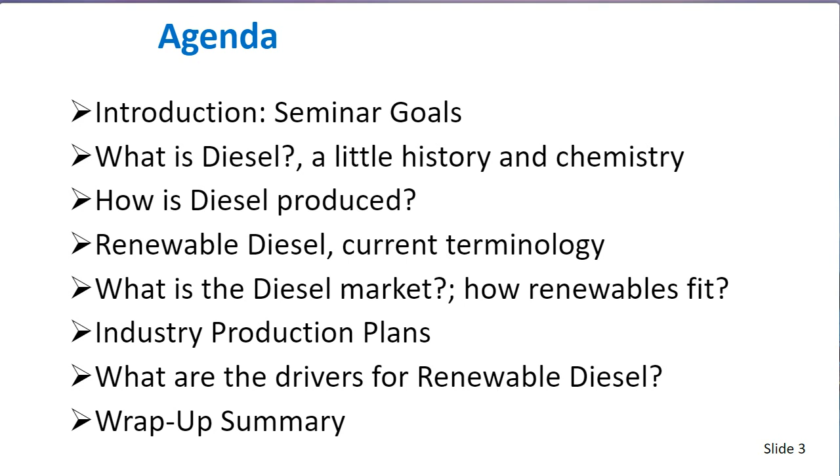So the goals for this presentation are to give you a high-level overview of renewable diesel, what it is and why we're concerned about it. We are going to be focusing on the known situation. I'm not going to get into forecasting wild cards of what might happen or not happen in the future, but just what we know at this time. We'll be primarily talking about the United States, although there are global interactions that are important. We will compress a lot of information into a short period of time, targeting for 45 minutes, and things are in a high state of flux, so anything you see might be changing rapidly in the future. Then we'll be gathering any points of interest for future follow-up.

Talking about the quality of the information we have here today, this information is in a rapidly changing area of renewable diesel, so expect that whatever you hear today is probably going to be changing. To my knowledge, all the information I have found here is in the public domain from various sources. Nothing is proprietary, it needs to be protected in that regard. The other thing you'll find is that the terms, when we talk about renewable diesel, are certainly not standardized at this time. So be cautious when you're comparing reports and data from different sources. I will also add that the dimensions and amounts of renewable diesel seems to generally be included in what we call biomass as an energy group when you're comparing data broadly from other energy sources such as nuclear, petroleum, coal, natural gas, solar, wind, etc. So biomass may include renewable diesel. Again, terms are not quite settled yet. So be careful, because renewable diesel data can be sorted in many different ways. So as you're digging into this, be careful to sort your data appropriately.

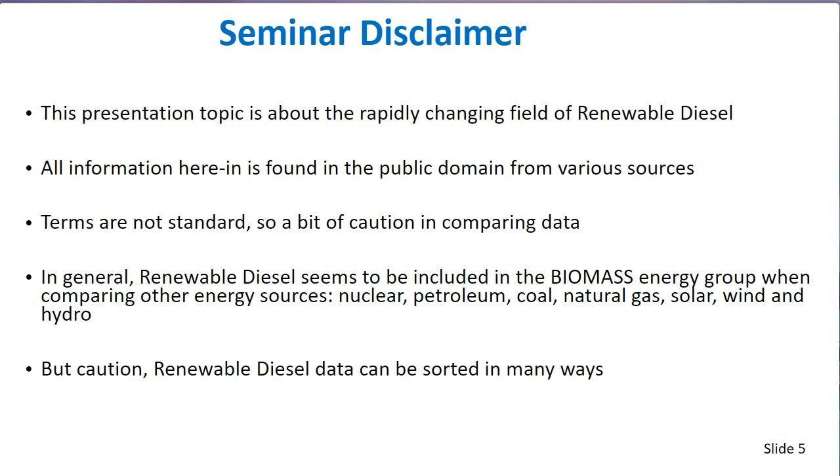Let's begin by talking about what is diesel. How is diesel produced in the industry today, what are some of its properties, and how does a diesel engine work? The diesel engine was developed by Dr. Rudolf Diesel, a German who studied engineering at the Technische Hochschule in München, and his goal was to improve the fuel efficiency and energy efficiency versus alternative spark compression engines or steam engines. He developed his compression ignition engine in the 1890s, and it was first patented in 1892.

In 1895, he founded MAN, or Maschinenfabrik Augsburg and Nuremberg, which is a good company today. His engine was tested successfully with a wide range of fuels, and it was originally developed on peanut oil. He found that he got very good performance with carbon molecules that were in the C12 to C20 carbon number range.

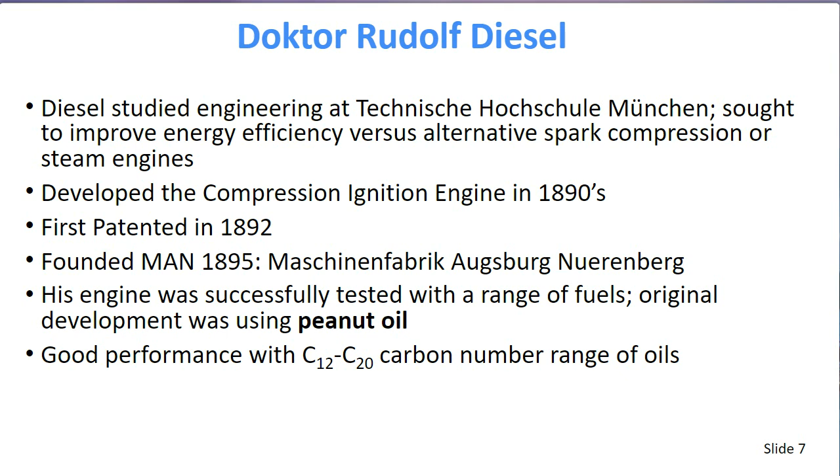Here's a picture of the first diesel engine. It's at the Museum of Technology in Augsburg. This first engine was one cylinder, it was about 3 meters high, and it was patented in 1893. Quite a big flywheel you see there.

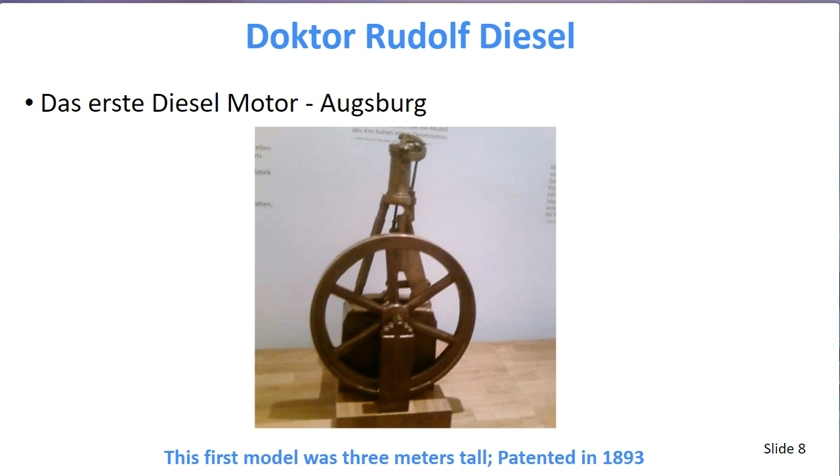Rudolf Diesel's first most efficient fuel was peanut oil, and that's the start of the story of renewable diesel. He had one problem though, or we all did, and that was there was not enough oil for fuel supply for his engine. Looking back in the late 1800s, agriculture and marine culture were limiting oil sources. Cod oil was being exploited, farming was at a small scale, whales were being hunted to extinction, and forests were largely being cleared.

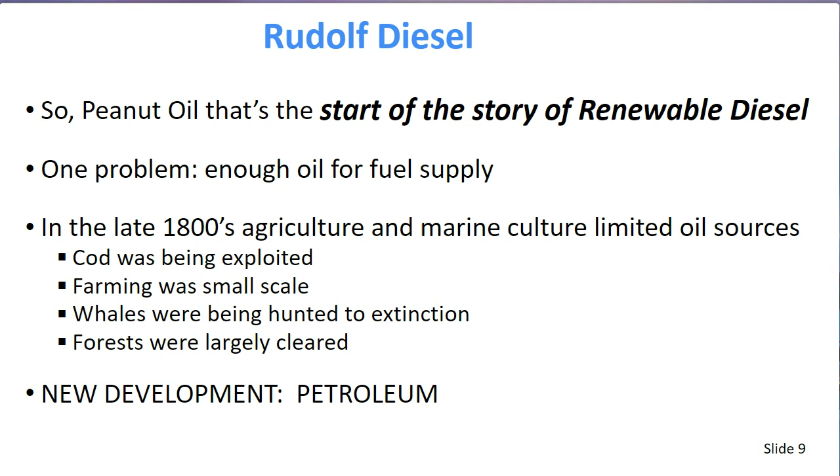However, parallel with that, there was a new development, petroleum. With petroleum, it was discovered that there were these diesel boiling range materials in natural petroleum. Petroleum itself is a mixture of molecules from methane, one carbon number, up to larger than asphalt, over 100 carbon numbers. These molecules consist mostly of carbon and hydrogen, so they're called hydrocarbons, but they can contain other atoms such as sulfur, nitrogen, oxygen, which are called heteroatoms.

The absolute composition and properties of crude petroleum vary a lot, depending on the original geochemistry. The diesel range, carbon-12 to carbon-20, is typically about 30% of crude oil's yield in composition. In that same range we have jet fuel, typically 12 to 16 carbon numbers, which can be separated from the diesel range or included in diesel. Refineries typically recover diesel from crude oil, and can also convert larger molecules, heavier than 20 carbon number, into the 12 to 20 range through processes called conversion.

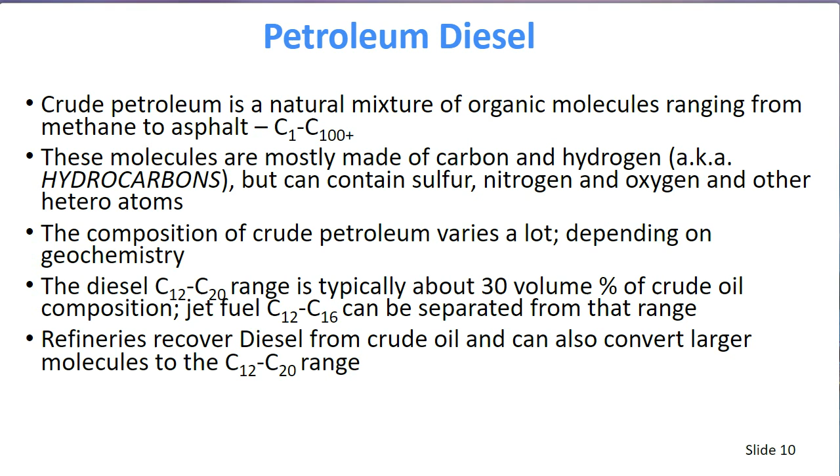Let's look at some of the key qualities for diesel fuel. Some of these include cetane, or its burning properties. The reference is normal cetane, a 16-carbon straight chain molecule, which in a test engine has a reference performance of 100 cetane. Cetane is a measure of the tendency of the fuel to knock, in other words the unoptimal ignition of the fuel. The specification for finished blended product diesel is typically in the range of 40 to 50 cetane number.

Lubricity is important because it's the viscosity required for the dispersion of the fuel and preventing wear of engine injector fuel. Sulfur is another important property. Sulfur causes corrosion in the engine, but we can mitigate that with a proper lube oil program. Also sulfur burns to form sulfur dioxide and sulfur trioxide emissions, which are environmental concerns.

Very important in diesel are what we call the low temperature cold characteristics. Two of those are the pour point - in other words, for this diesel fuel, as we lower the temperature, at what point does it no longer flow? Yet another is the wax appearance point - again, as we lower the temperature of the diesel, at what point do wax molecules or solids tend to form in the fuel, causing a problem with filter plugging for the fuel system.

We want to make sure the diesel is safe to handle, and the property we mostly watch is the flash point, which is the temperature at which, with a spark, the diesel will ignite. In other words, you raise the temperature, and at some point it will ignite - that's what we call the flash point. Yet another and last is stability. It's very important for storage - we don't want the oil to degrade with storage, forming gums and other problems that will foul our engine storage system and combustion.

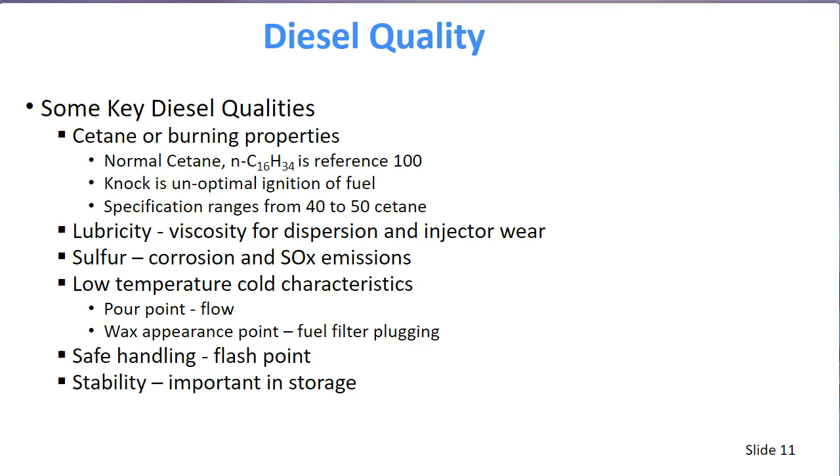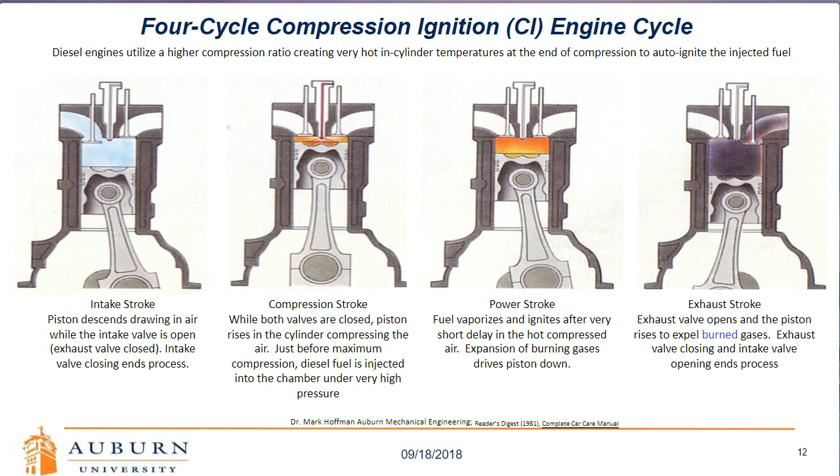So now that we understand a little better about where diesel comes from and a little bit about its properties, let's talk about renewable diesel, and we'll move on to talk about the diesel market.

One, you mostly hear about, is biodiesel. This typically is fatty acid methyl ester, which is easy to produce. It's what I think of as the first generation of renewable diesel, and it's essentially most of everything you hear about today. It has limited production, and it has some quality and compatibility issues that we'll look at. It's also hygroscopic, which means that it absorbs water, so it has to be carefully handled as far as logistics are concerned, because we don't want wet diesel.

The next group of renewable diesels is hydrogenated vegetable oils. This is what you're hearing more about as coming into the market, or HVO. It's the next generation, and it requires hydrogen processing, and the product therefore becomes compatible and is quite useful in petroleum diesel mixes and in diesel engines.

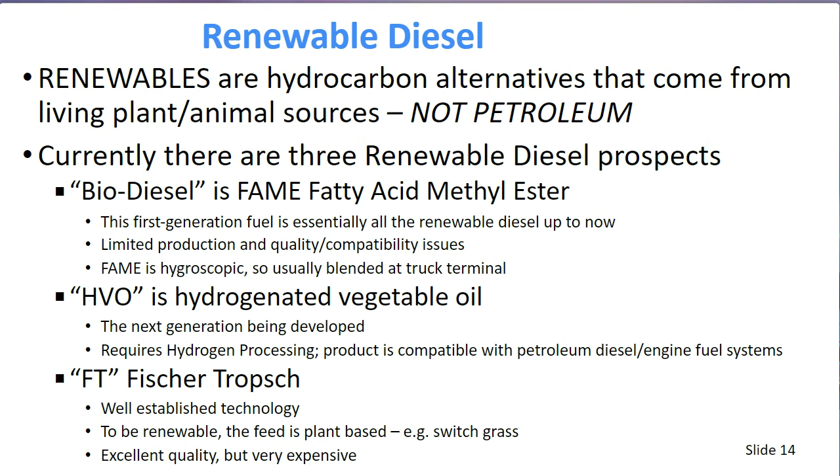So why not just burn raw waste oils or fats as diesel fuel? Well, my friends that are in the industry tell me to make emphatically sure that we express that this is no, no, no. These unsaturated fatty acids have lower oxidation stability. They react with oxygen in the air to produce peroxides. They degrade to produce products that cause sludges and lacquers in the fuel system. These natural oils also have lower thermal stability, and so they gum up in the diesel engine, injectors, pistons, rings. They gunk up the ring grooves, cause sticky rings, and it's just not good for the diesel engine, and the disastrous results can happen pretty quickly.

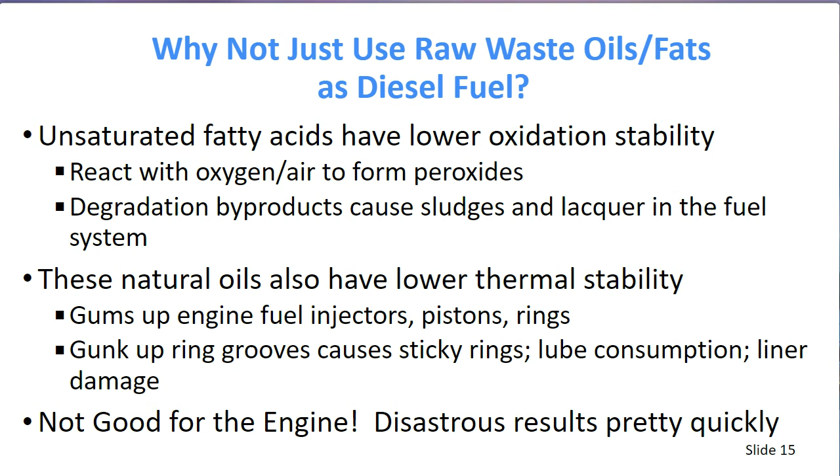So, no, no, no. Let's visit this first generation of renewable diesels, which I think of as biodiesel today. You'll hear biodiesel and renewable diesels used interchangeably in sources. I like to separate them and use my terms of renewable diesel, but fatty acid methyl ester is one of those.

The base is a fatty acid vegetable or animal oil, and by nature, this is rancid material. If you've ever had old oil hanging around the house, you know it turns sour bad. That acidity causes corrosion problems. Now, we can correct that by turning it into an ester, and that reduces this issue of corrosion.

It's relatively simple and can be done in small batch processes. It needs a catalyst, which can either be a strong acid, such as sulfuric acid, or a strong base, like caustic. Molecularly, what we take is that fatty acid, and we react it with an alcohol, and we therefore get this fatty acid methyl ester, and we also get a byproduct of glycerin.

My friends at Auburn in chemical engineering say that a good opportunity is to somehow recover this glycerin in this process economically, as it is very dilute, and there's a lot of other impurities in the glycerin phase. So it's just gone to landfills right now. But glycerin is a valuable product - you and I use it, and that's a different subject. But if we could recover that glycerin economically, it would really boost the attractiveness of FAME.

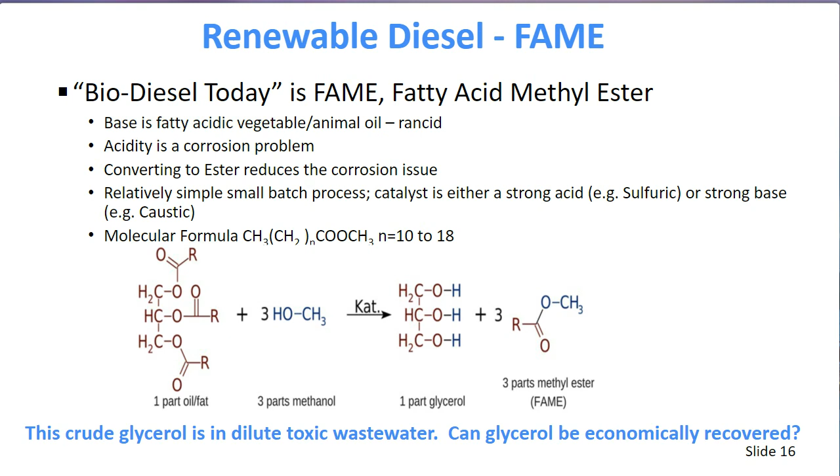So let's talk some more about this renewable diesel FAME properties versus petroleum diesel. FAME has good cetane - it's about 56 versus 50, and that 40 to 50 is a typical spec today. It's a little bit more dense, that's not a big issue. The FAME energy content is a little bit lower, not drastically. The CO2 equivalent emissions is a little bit favorable versus petroleum.

But FAME has an issue with what is called wax formation. It's not actually wax - these are solid particles of glycerides that do form and plug filters. Also, FAME oxidation stability is poor, and so FAME causes fuel injector corrosion and spray blockage. It can affect elastomer seals and cause failures, and so it's really difficult for engines as we design them today to handle them.

Engine manufacturers and therefore pipelines limit the FAME in a diesel blend to 5 to 7% of the product diesel, and we in the industry call that the blending wall. That blend wall limits the amount of FAME that can be blended into diesel. Additives have helped to some extent, but this blend wall limitation on FAME blending will not meet some of the goals that are in place for replacing petroleum diesel with renewables.

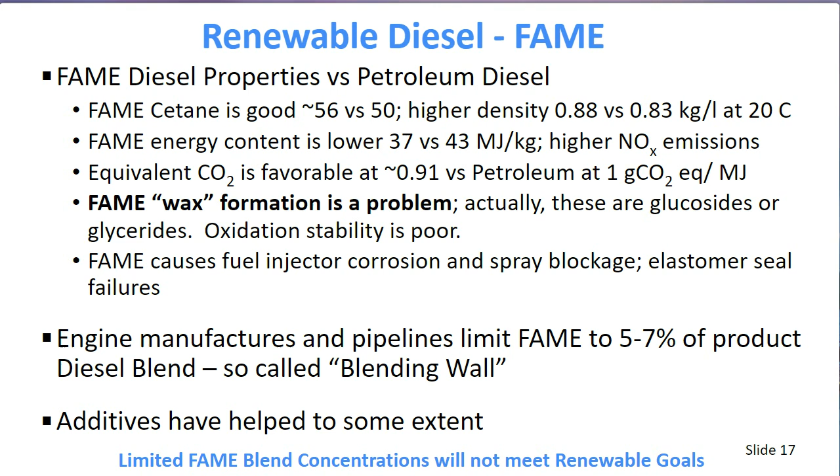So as we just said, this blend wall for these so-called biodiesels limits the amount of renewable diesel that can be made with that convention.

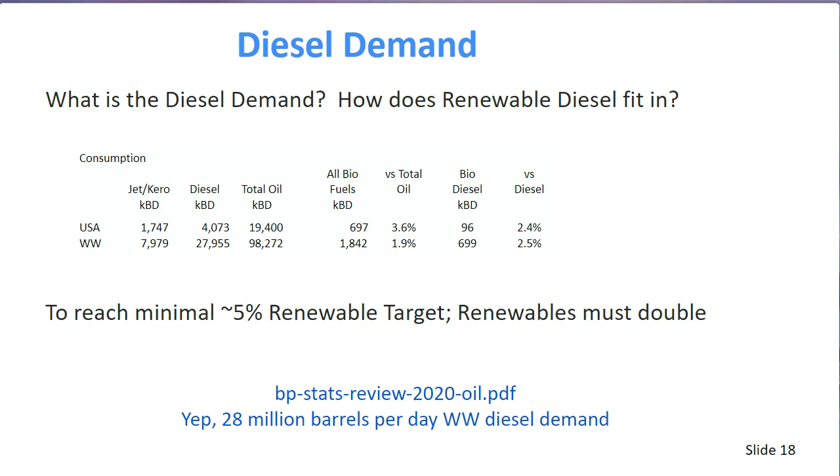So what's in the press today are the next generation of renewable diesels, and these are hydrogenated vegetable oil. People call it biodiesel tomorrow. This HVO is the second generation. The base is still vegetable oil or animal fats, but it's hydrogenated to treat the acidity issue that comes with these natural oils.

Sometimes we can hydroisomerize to improve some of the cold flow properties by using hydrogen. We have established technologies that we use in refining, petrochemicals, and food processing to do this. It does require hydrogen, and large scale fits well into existing refinery configurations that typically have hydrogen production. It is more costly than today's conventional FAME, or what we call biodiesel most of the time.

There is a trend toward what's called gray diesel, from gray hydrogen today, and that is from steam methane reforming. It is the lowest cost source of produced hydrogen. Here we're talking about basically taking methane or some other hydrocarbon, reacting it with water to produce hydrogen and carbon dioxide.

If electricity was cheap enough, you could use electrolysis of water to produce so-called green hydrogen.

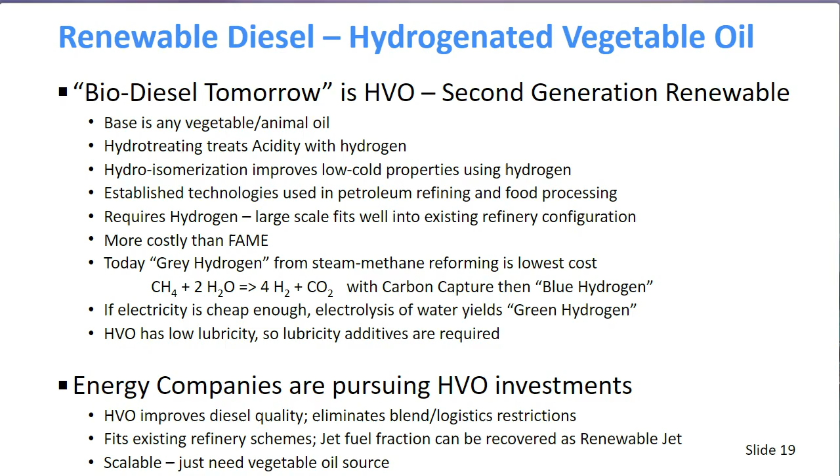So let's talk about industry production plans. These have been in the press, and it's a pretty active area, so dynamic, the timeline and the scope of these projects are going to be changing, and so whatever we have here is a snapshot. But let's take a look.

So let's look at where renewable investments have been announced. One reference is for U.S. renewable diesel production that it could reach 330,000 barrels a day by 2024. The source is the U.S. Energy Information Administration, published in Hydrocarbon Processing last year. And put that in perspective, in 2019, as we saw, U.S. biodiesel production was about 96,000 barrels a day, so that's a considerable increase.

We talk about other investments, large scale, that have been announced. Well, Neste has been the world leader in renewable diesel for some time. They are the leader in hydrotreated technologies for vegetable oil and animal oils.

They have a proprietary technology that can be licensed, led by their investments at their Porvoo refinery in Finland. In two phases, Porvoo 1 and Porvoo 2, they have added biodiesel, renewable diesel production on an industrial scale, with the last expansion in 2009. So they've been established for a while.

They have announced big investments for Rotterdam, a large scale, about $1 billion investment, teaming up with Air Liquide to provide the hydrogen, sourced from hydrotreated vegetable oils. And yet another big investment in Singapore, gathering vegetable oils from that region, another $0.8 billion investment, also teamed up with Air Liquide. So in total, by the end of 2022, if everything stays on schedule, Neste could be producing 90,000 barrels a day of renewable diesel.

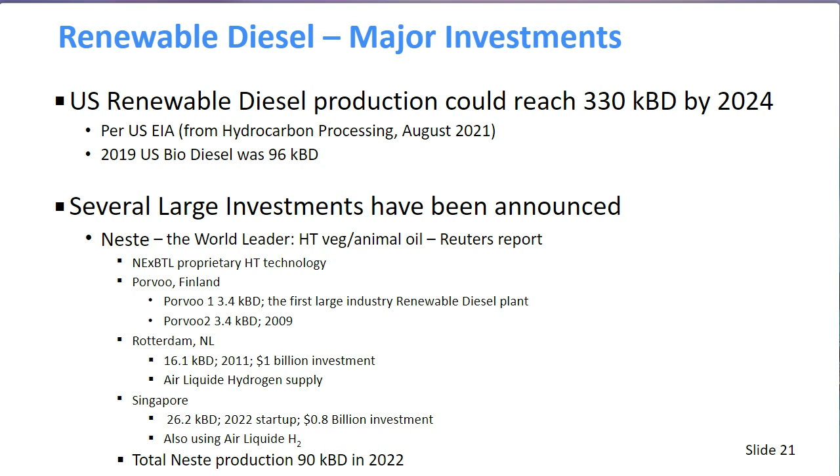Another major investment for renewable diesel announced is by ExxonMobil, sourced from Hydrocarbon Processing about a year ago. ExxonMobil has contracted to buy renewable diesel in partnership with Global Clean Energy in Bakersfield, California, for the California market. Global Clean Energy has a patented process that grows a better yield of cover crop that produces the oil for vegetable oil.

ExxonMobil has a proprietary hydrotreating process, EMRD, renewable diesel hydrotreating. Exxon's been big in hydrotreating, hydroprocessing for a long time, and this is going to expand on bio-dewaxing, an extension of what they've done for lubricants and diesels for a long time.

They have a 20,000 barrel a day hydrotreated vegetable oil project planned for their big Strathcona refinery in Alberta for 2024. This particular project will include carbon dioxide capture from the steam methane reforming and re-injecting that into underground storage, where it will be used to help recover conventional petroleum. Exxon, therefore, will be planning to provide about 40,000 barrels a day of renewable diesel by 2025.

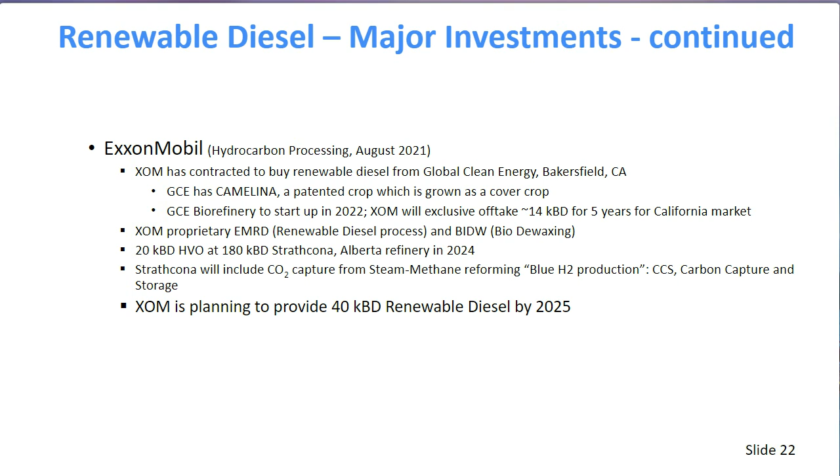So let's look further. I think what you'll see is there's quite an array of approaches to making renewable diesel. One is Marathon. They are going to be using waste vegetable oil, the term WVO, converting it into FAME. They have a plant up in Dickinson, North Dakota that has already started up, and they are planning a 48,000 barrel a day Martinez, California operation that's to start up next year.

Valero is also in the business. They call their product Diamond Green Diesel, and it's going to use used cooking oil, called UCO, in order to create a hydroprocess material. They're using a UOP technology and plan to have a plant at their St. Charles, Louisiana refinery, as well as one at their Port Arthur refinery starting up next year.

BP has announced a plan for their Cherry Point, Washington refinery. They're going to be using co-processing, which means mixing waste oil with conventional diesel and processing it together that way. Startup is supposed to be this year, 7,000 barrels a day, a $45 million investment.

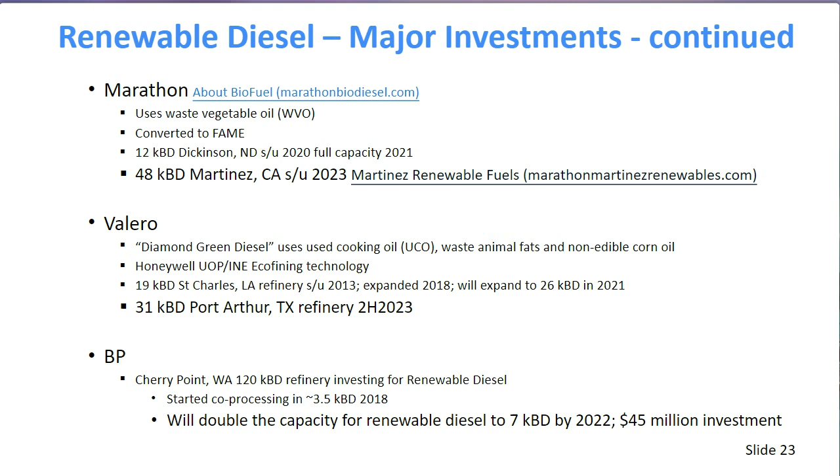Phillips 66, yet a different approach. At their Rodeo, California refinery, they're actually going to be converting their refinery to just produce renewable diesel. They are going to be starting up a hydrotreater early and then expanding that, using Topsoe technology for their hydrotreating process. Their goal is to convert that refinery into a 50,000 barrel a day renewable fuel operation by 2024, and at that point it will be the world's largest.

And they also have an investment at their Humber, UK refinery, where they've got a sled-mounted cooking oil renewable diesel operation planned. It's 1,000 barrels a day, and it comes as a completely mounted operation that they'll tie into the refinery. There are various others, but the scale of any of these remains small in the scheme of diesel requirements, and they're also relatively expensive.

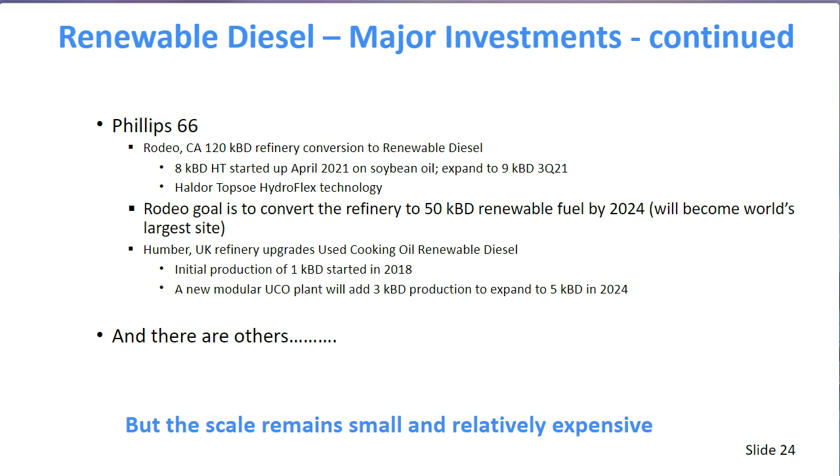So let me have you think about the scale of this hydrogenated vegetable oil using waste oils. Just think about it for your family. How much vegetable oil do you consume per year? In our home, maybe we consume 1 liter per month. Typically that is canola oil, called rapeseed oil, particularly when making diesel. But we also consume some corn oil, soy oil, olive oil, coconut oil, sunflower oil, palm oil. So maybe in all, we consume maybe 3 gallons a year.

And how much waste oil do we produce? Well, we actually consume most of it as food, so maybe 1 gallon a year. So we are not going to be generating a lot of waste oil. And then how much petroleum do you directly consume? I reckon I consume maybe 1 gallon a day, because I drive maybe 25 to 30 miles a day on average. So renewable diesel from waste oil, I'd say, is just a small scale.

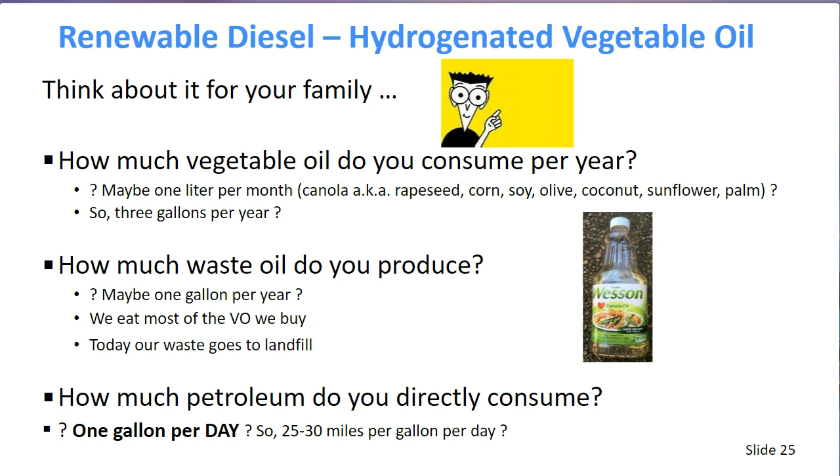So vegetable oil has limited potential for making significant volumes of diesel. However, the third tier of renewable diesel horizon is Fischer-Tropsch, and it basically gives us an unlimited potential renewable diesel.

Fischer-Tropsch can potentially upgrade any carbon source, such as switchgrass, and therefore it becomes renewable. The technology in the literature is often called BTL, biomass to liquids.

Fischer-Tropsch itself is an established technology. It was developed back in the 1920s by Fischer and Tropsch, and has been widely commercialized. Originally based on coal in Germany and South Africa. Since then, a lot of coal to liquid production, and also natural gas as a carbon source. And the major plants doing that are in South Africa as well as Qatar. Qatar has two major plants that are converting natural gas to liquids.

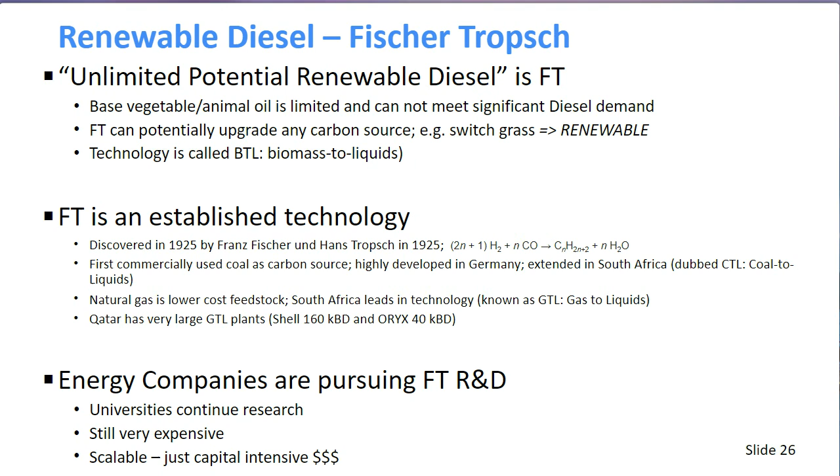What we're talking about here to be renewable, though, we need a non-fossil fuel source. And so switchgrass and other sources are being researched. Energy companies are actively pursuing that in R&D. A lot of that is being done by universities that continue to do the research. It's still very expensive, but it does have the potential of being very scalable. It is capital intensive, but plants of various size can be built and fit into existing refinery configurations.

So continue with renewable diesel. From a biochemistry point of view, there are big opportunities. So if we could have plants capture carbon dioxide to produce renewable diesel, that could be a win-win. And one of the greatest potentials is algae.

Algae can grow very, very fast. And so can we convert algae mass into diesel? Can we use Fischer-Tropsch as the carbon source from algae? Or are there enzyme and other conversion processes? This is frontier R&D, and again, universities are actively looking at this. And again, it can be scalable because nature produces a lot of algae. And if we farm the algae, we have almost an unlimited source. And it doesn't compete with food.

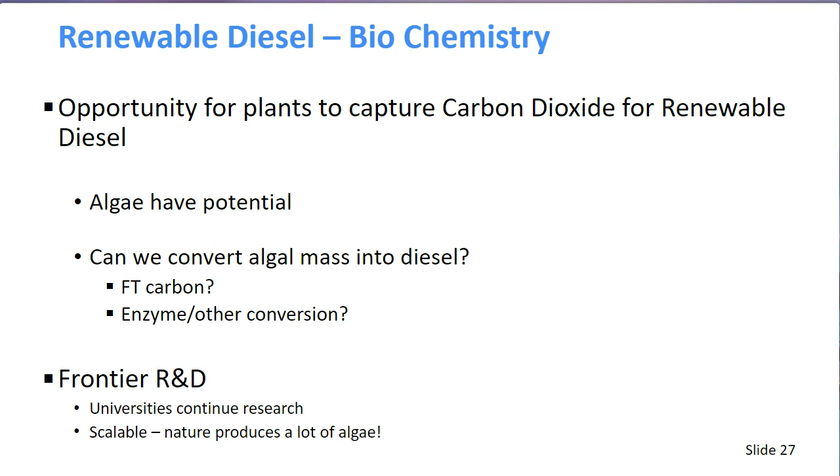So we've discussed some of the activities that the industry is taking in order to make renewable diesel. So what are the drivers for this? What is making the industry do this? It's largely a very green effort to make this happen.

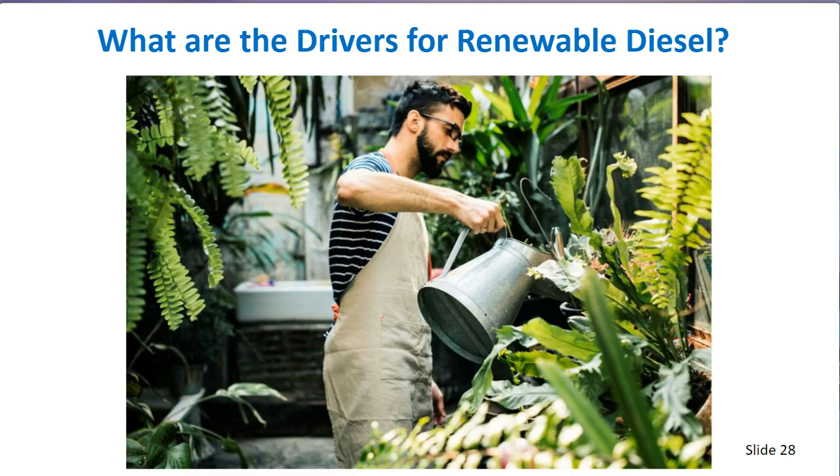The primary drivers for renewable diesel are mandates. In Europe, the EU is controlled by what's called the Renewable Energy Directive, or RED. RED Phase 1 required that 7% of FAME be in diesel blends. Remember, that is the first phase of renewable diesel. The new RED 2 increases additional HVO, hydrotreated vegetable oil, up to an additional 10% of blend. And by 2030, RED 2 requires 14% of all road and rail fuel must be renewable.

Big drivers for the industry complying. The Canadian Federal Fuel Standard requires 2% renewable diesel, and the provinces which have more autonomy can mandate higher levels to meet these greenhouse gas reduction targets.

In the U.S., renewable fuel standards are set by the federal government. Producers or importers have to either blend renewables or obtain blend credits. Complicated tracking of these blend credits is managed by what we call renewable identification numbers, or RINs. Very complex, and these are typed by renewable fuel based on feedstock, fuel type, energy inputs, greenhouse gas reduction, a very complicated accounting for renewable effects.

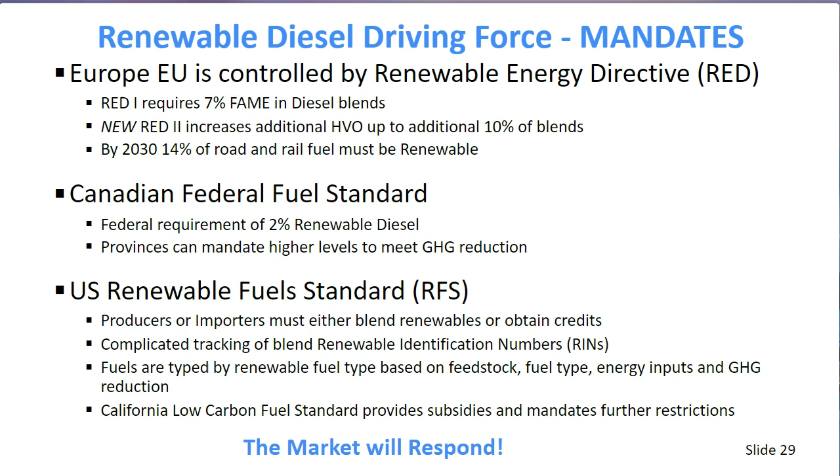So if we look back at a more normal time, where would we find price information? Well, there are various price data sources. One of those is Platts and others that offer real-time price data, and that's very useful for commodity traders dealing with day-to-day, hour-to-hour trading. For us observers, it's not quite daily prices we need. Typical prices are good enough. So two sources to point you to are New York Harbor Diesel, which gives an idea of Atlantic Basin landed diesel cost, and FAME, which is priced out of the Netherlands.

So the current market, when I checked, in response to these mandates and constraints, diesel in New York Harbor was trading at about $107.50. That's finished ultra-low sulfur diesel, similar to Euro 5. And FAME in Rotterdam was trading at about $335 per barrel. So why would a diesel blender want to buy Rotterdam FAME and put it into diesel with that kind of price differential? It's mandates. Mandates are driving the decisions.

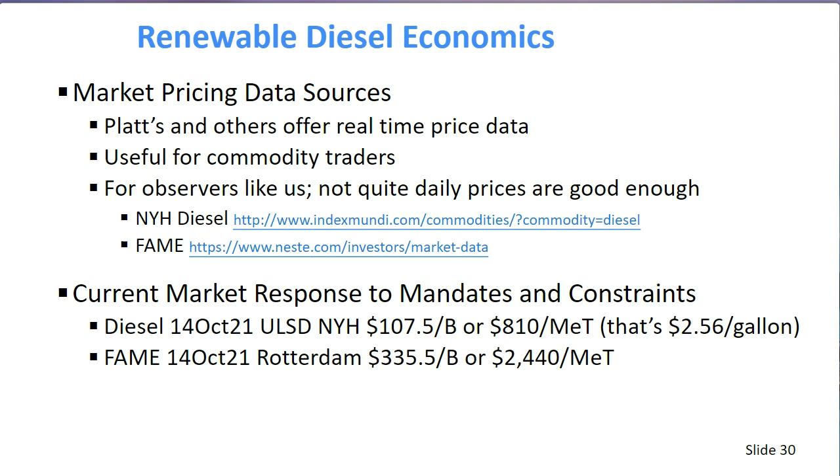Since this is a MUGI Haverly LP modeling conference, we have to talk about the impact on our LP modeling of renewable diesels.

Modeling renewable diesels, if you're not already doing it, is quite easy. We need to input the diesel component blend qualities, such as density, cetane, sulfur, whatever your model requires. Then we need to provide the landed cost of the renewable component, which could be various components you're considering blending into your diesel pools. We need composition blend constraints so we can control the amount of diesel or blendable renewable diesel going into the blend. And for us planners, we need prices consistent with the other raw materials and products for the case we're running.

It's pretty easy to do this. Then you'll see that the renewable diesel will be selected or driven by constraints in order to meet the requirements. People ask, should we be modeling the cumulative renewable blend credits?

I say no, that's well outside the LP model optimization. It could be a factor in setting the constraint targets in the LP, but keeping up with all those credits, which are typically reported cumulatively per year, is outside the LP model. Better tracked by other tools - Excel spreadsheets are typically used, but other tools can help track those credits. A question I have for GRTMPS users: are any refineries modeling blend credits within a refinery model? None to my knowledge, but I'd be interested in your comments.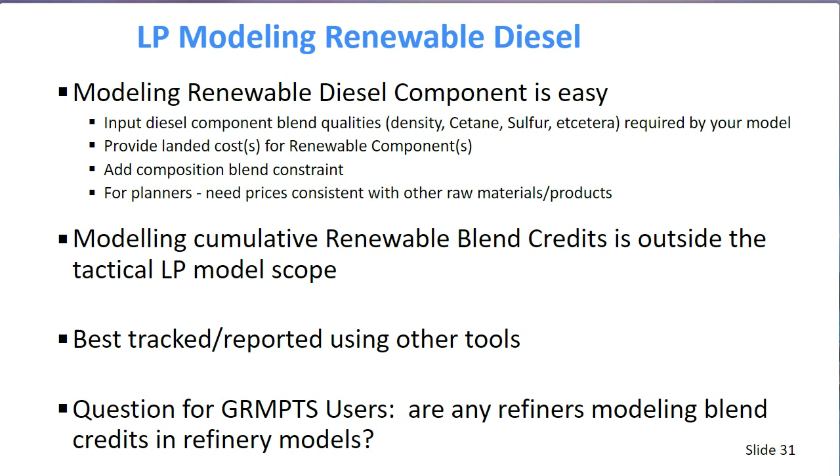Let's wrap up the presentation. Overall comments: transportation fuel consumers like you and me are coming under increasing pressure to reduce fossil fuel consumption and carbon footprint because these are believed to contribute to climate change. Renewable energy, including renewable diesel production, is largely in a state of change. The third comment is the cost and economic concerns of implementing renewables are no issue for those committed to saving the planet from climate change. So be prepared for more change.

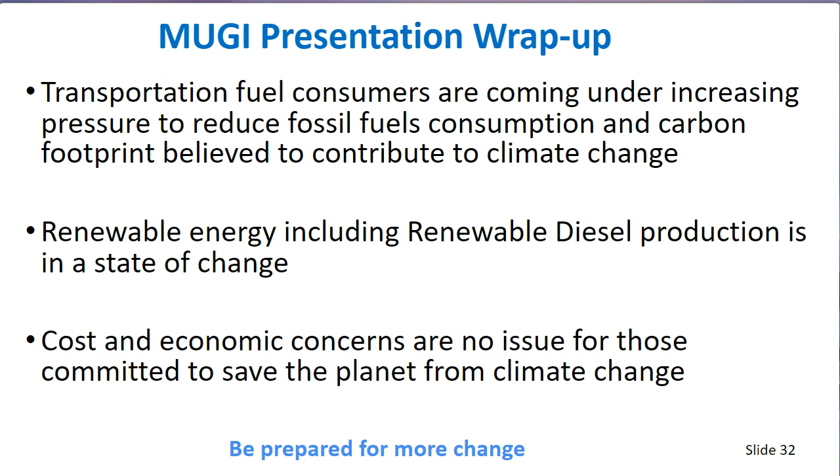Looking back, originally steam and horsepower had limitations in a growing economy. The gasoline internal combustion spark engine gave us great flexibility for small-scale engines. Rudolf Diesel invented a more efficient internal combustion engine, and internal combustion became the main motor of ground transportation and agriculture. Internal combustion vehicles revolutionized life in the early 1900s with commercialization, and that change was driven by lower cost and more flexibility. So the good news is, looking to the future, renewables can enhance today's systems, and this change will be driven by lower renewable cost and more flexibility.

So be prepared for more change. It's coming.

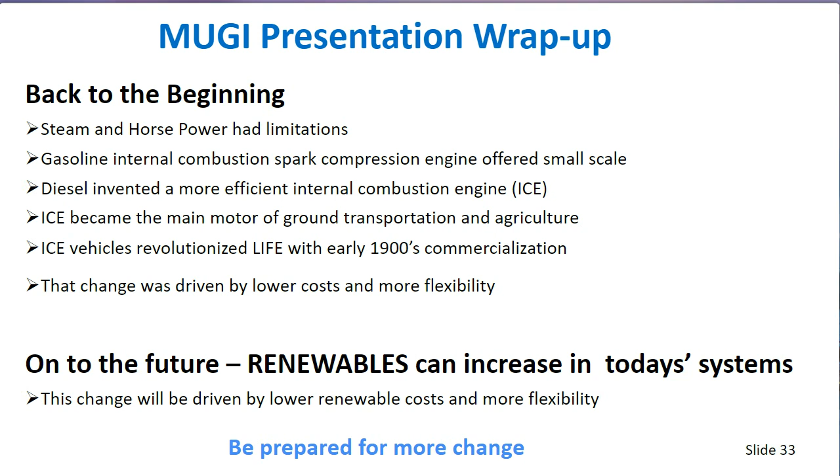Thank you very much for allowing me to make this presentation. I hope it's helpful.

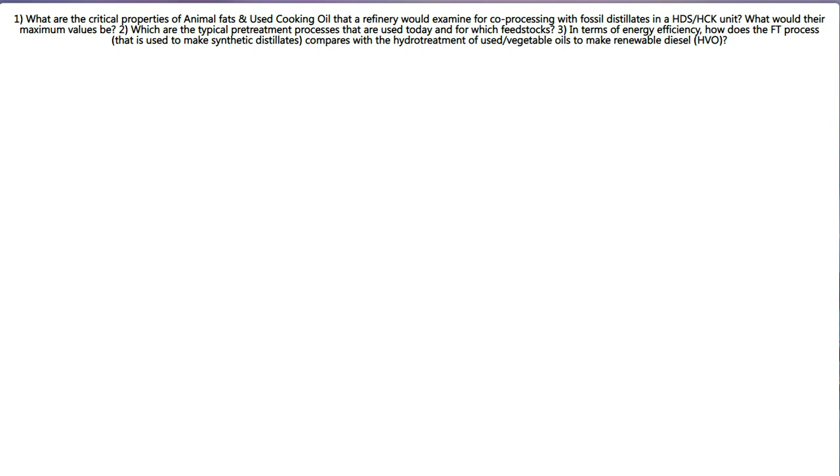So I'm taking Randy's comment as these biocrudes, but really synthetic crudes, be they renewable types or whatever, and whether we feed those into the front of the refinery or cat cracker or whatever. I would say that what we need is the characterization, and we have fed alternative streams to petroleum into cat crackers before, such as streams that come out of steam cracking, and other sources. So what we need to do is just characterize those as a feedstock and build those into the model. That characterization depends on what your cat cracking model requires.

For rough screening, I think you could put in the best characterization you have and see how it fits. To actually plan on a commitment, you need to do some detailed work on a better characterization of those feedstocks and the variability of it, and get more precise. But the beauty of the LP is if you've got some rough numbers that describe the properties you need for your cat cracker, put them in the model, see what the valuation would be and how it fits in, and you get a rough idea right there. But again, depending on the sources, you need more detail, Randy.

And then, Richard Tan was saying that CHS is modeling RIN in their group's model. Good.